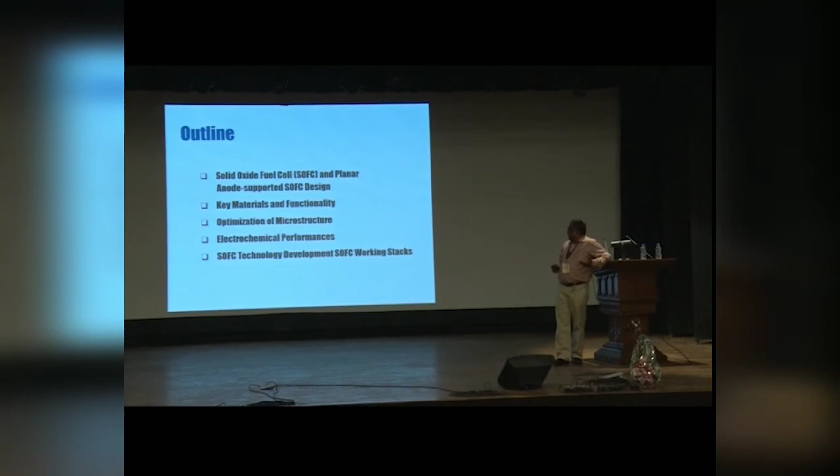So I thought to give you a little introduction about what a solid oxide fuel cell is and its particular design, and then we will talk about materials and their functionality, how we have optimized the microstructure and the role of microstructures, then electrochemical performance, and if possible I will show you a small video of how we made up to a 1 kilowatt solid oxide fuel cell for the first time in India. So with this, let me start my talk today.

Basically, as you know, we are in the era of coal, because we still have a sufficient amount of coal, and most of the electricity you are getting now comes from coal-based power plants. Some solar has started, but that will take much more time, although India has an ambitious program. But let me concentrate here. We are basically going from the fossil fuel era to the hydrogen economy, where the fuel cell is one of the very important candidates. Why it is important, I will talk about that.

But before that, let me tell you about these two. The first is carbon dioxide: whatever we are producing will not be allowed at one point of time to remain in the environment. So you have to stop that, and for that you need sequestration or carbon dioxide adsorption. A lot of R&D is going on all over the world, and a few technologies have started coming in the advanced countries.

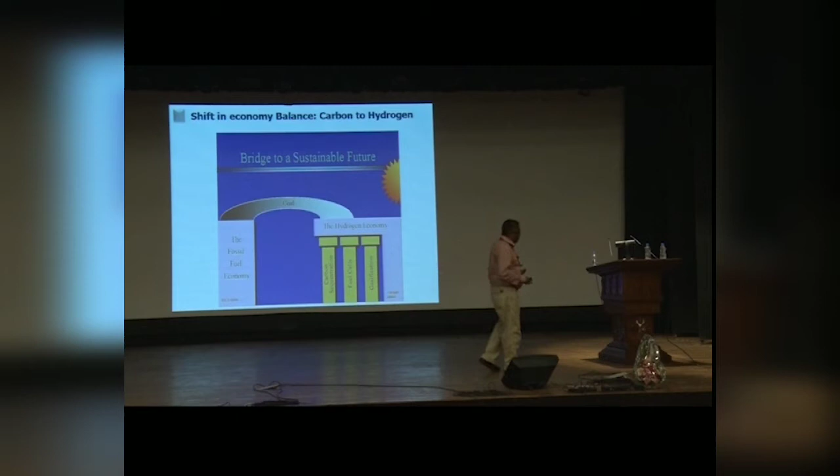Another one is gasification. In our country, BHEL and NTPC are the leaders, doing a lot of gasification work. They are trying to produce coal gas from coal instead of using the coal directly, because our coal quality is not that good. For that there is IGCC technology, which they have developed, and they are trying to supply this coal gas through vendors to all of us. Fortunately, that coal gas could be a very good fuel for the solid oxide fuel cell, which I will be introducing today.

So why fuel cell? There are three major aspects. One, it is environmentally benign. Two, its efficiency is very high; you will always get above 50% in the case of a fuel cell. And third, the solid oxide fuel cell operates at high temperature, around 750 to 800 degrees centigrade, so there is a lot of fuel flexibility. In general, all fuel cells can use hydrogen, but in addition to hydrogen, a solid oxide fuel cell can use natural gas, even petroleum and many other gases.

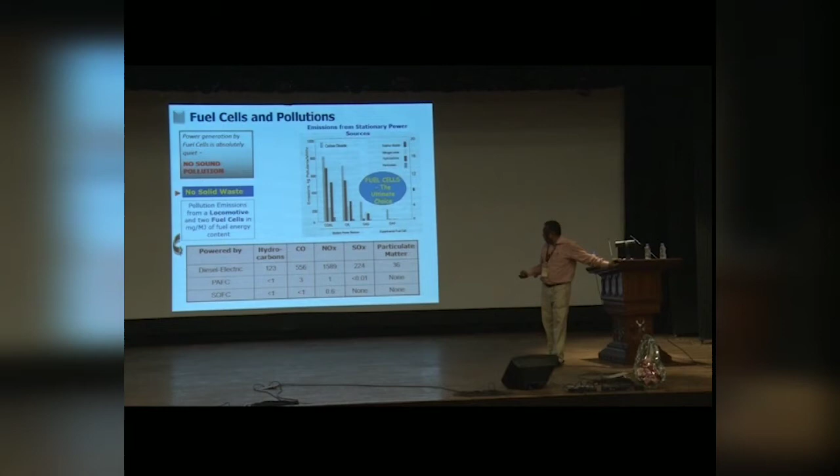As you can see, in the case of the solid oxide fuel cell, you do not have any particulate emission. In coal-based power generation, as you know very well, there is a huge amount of ash, and its disposal is a real problem. But in this case there is absolutely nil particulate matter. That is number one. Number two, the gases they produce are very low, acceptable according to the Kyoto Protocol. If you use CH4 or other hydrocarbons, there will be some carbon dioxide from the fuel cell, but that is very minimal.

Another advantage is that it's soundless. You will not hear any sound when it produces power. And you will be surprised to know that Google has been using it for the last 5 years in their main plant in California. They are getting power out of the solid oxide fuel cell itself. So the technology is very mature, and it is the way to come.

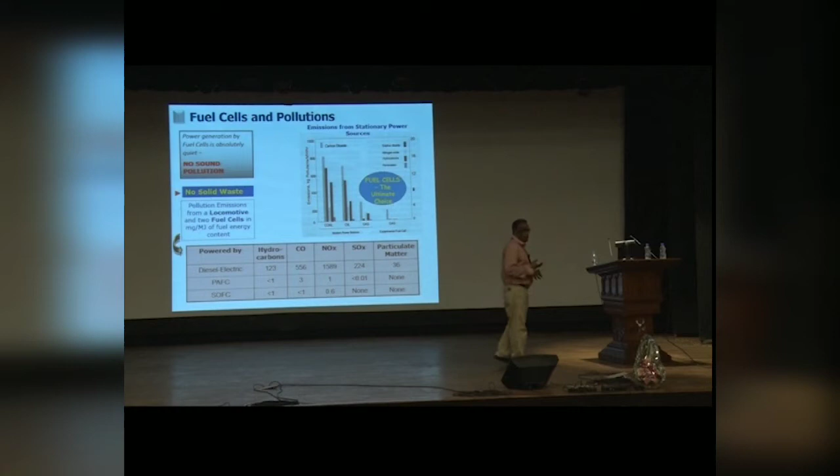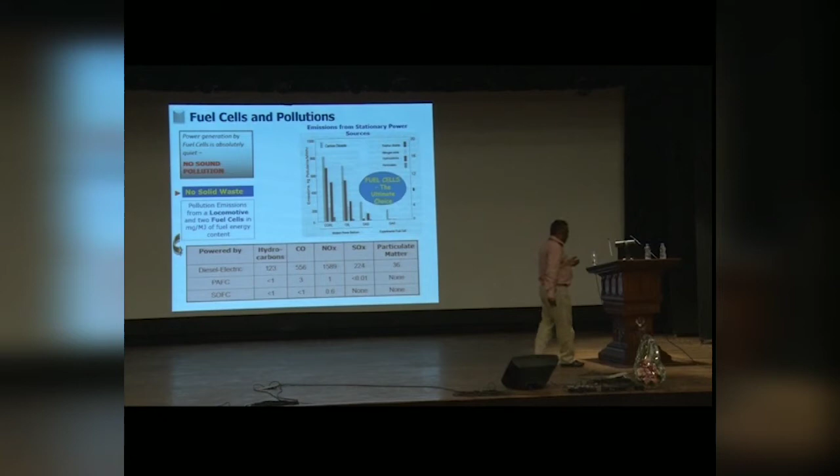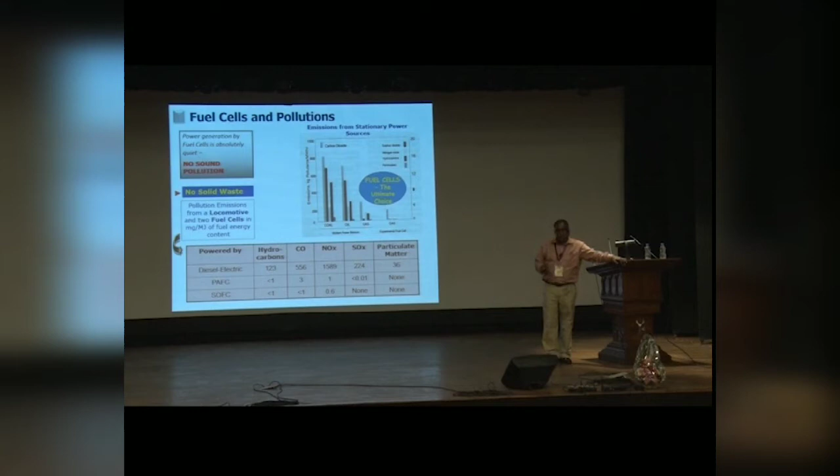But there are many difficulties because of cost effectiveness and so on. The major players are not coming forward to commercialize this particular technology because of the cost issue. But I would say that millions of small units in the range of 3 to 5 kilowatts are already in practice in households and many other utilities like hospitals, and, as I said, offices like Google's.

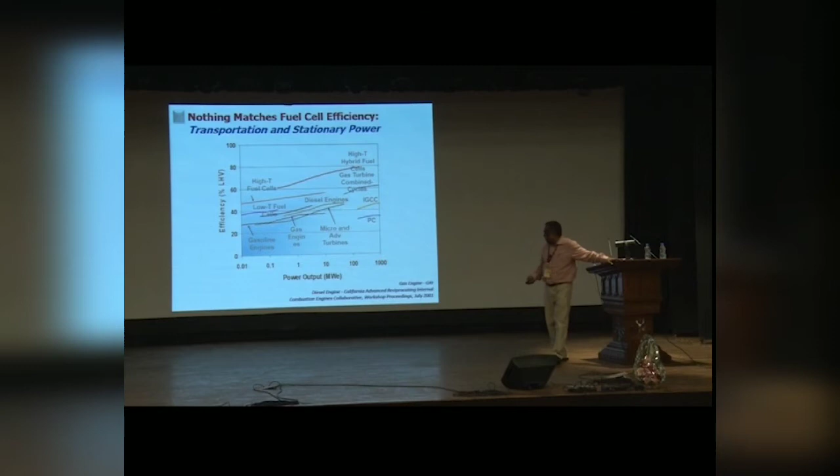So in a nutshell, a fuel cell is the device which can convert the chemical energy of the fuel directly to electrical energy. So there are no other energies in between, as in the case of coal, where there are two more energies it goes through, starting from the burning of the coal to electricity produced via the mechanical energy. But in this case, it is a direct conversion. So that is the basic difference.

Another difference is that, as you know, we use the battery. The battery is also a chemical device, and this is also an electrochemical device. It has anode, cathode, and electrolyte. Normally, the electrolyte is sandwiched between the anode and cathode, but there are many other designs. I'll introduce to you what those devices are.

So as I said, 1 kilowatt and more one can produce out of this solid oxide fuel cell, and another one is its fuel flexibility. As I said, different types of fuels can be used as an input for these fuel cells, and as long as you have oxygen or air on the air side and fuel on the anode side, you will get power out of these fuel cells.

In contrast, in the case of a battery, as long as its chemical constituents are there, you will get power, no matter whether it is a primary battery or a secondary battery. In the case of a secondary battery, what we call a lithium-ion battery, you need to charge it. In the case of a primary battery, which we buy from the shops, you have to throw it away. So that is the basic difference. In this case, as long as you keep on supplying fuel and air, you will keep on getting electricity.

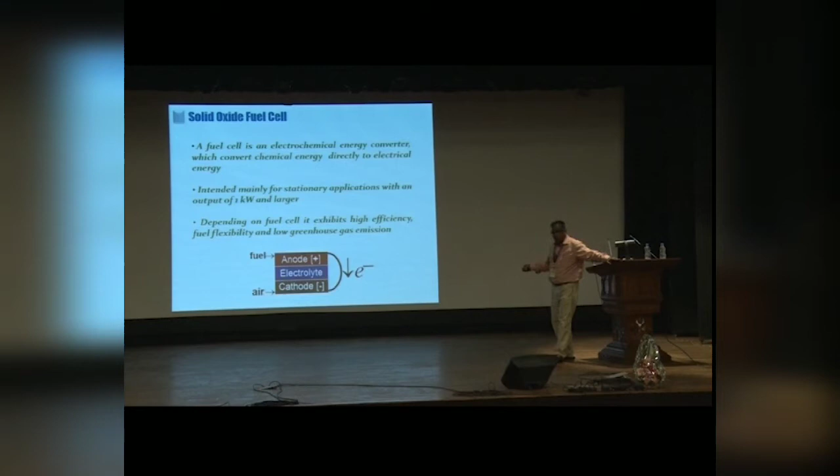So that way, you may see that it is a very simple device, because it is an electrochemical device. That's the reason it is very simple. But there are a lot of complications in making it and devising how to make the device. I will come to that very shortly.

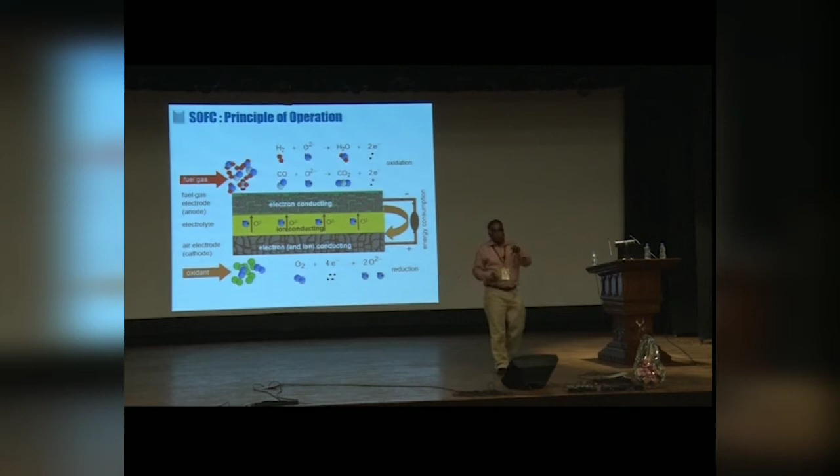But before that, very briefly, as I said, the electrolyte is sandwiched between the two porous electrodes. This is the anode, the green one, and this is the cathode. The electrolyte should be fully dense, otherwise it will not allow oxygen ions to conduct at high temperature. The electrolyte is chosen so that it conducts only oxygen ions at high temperature. It will not pass or channel any gas. So it has to be fully dense. That is the number one criterion.

So what is happening basically when oxygen comes to this interface? In electrochemical devices, one electrochemical reaction takes place between the cathode and electrolyte, and another electrochemical reaction takes place between the anode and the electrolyte. When oxygen comes, either from air or you put oxygen directly, it reduces the oxygen molecule and forms oxygen ion, O2- ion. So what will happen to the O2- ion at high temperature? It needs to conduct.

It will get the path here, that is the electrolyte, 8 mole percent yttria-stabilized zirconia. It has only ionic conduction, oxygen ion conduction at high temperature. So it will help conduct oxygen ions, and as soon as they reach this interface, they will combine or oxidize in the presence of hydrogen or carbon monoxide. Why did I say that? Because when you give CH4 or a hydrocarbon, there is carbon monoxide also.

So it combines with hydrogen. Let us take the simple case of hydrogen. This hydrogen and oxygen produce H2O and electrons. You will see that the electrons are always flowing, and if you tap here, you will get electricity. So that is the simple mechanism, but there are certain conditions.

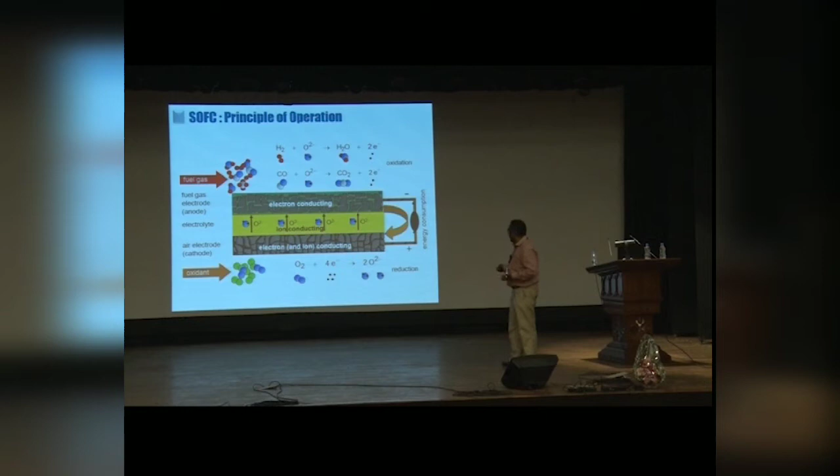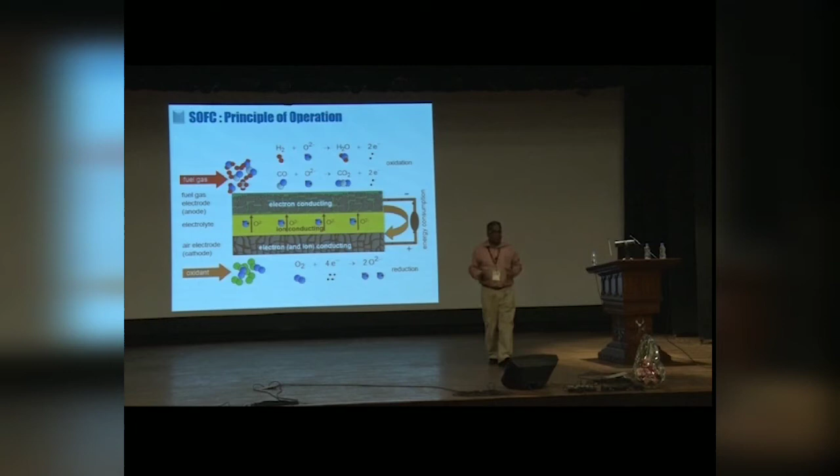And the other condition is that you must keep it at a particular temperature, at which oxygen ions can be produced. In our case, we keep it at 800 degrees centigrade, but from 700 to 800 degrees centigrade you will always get some oxygen ion conduction. So why is it happening? It is basically because of the Nernst equation.

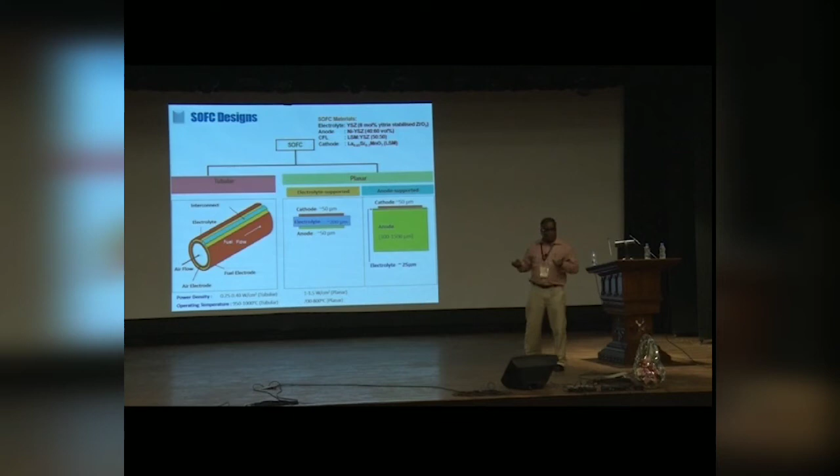So what are the materials? I have another slide, but let me tell you, the electrolyte is yttria stabilized zirconia, 8 mole%. It is commercially available. And the anode we are making by mixing nickel and yttria stabilized zirconia: 40 volume% nickel and 60 volume% yttria stabilized zirconia.

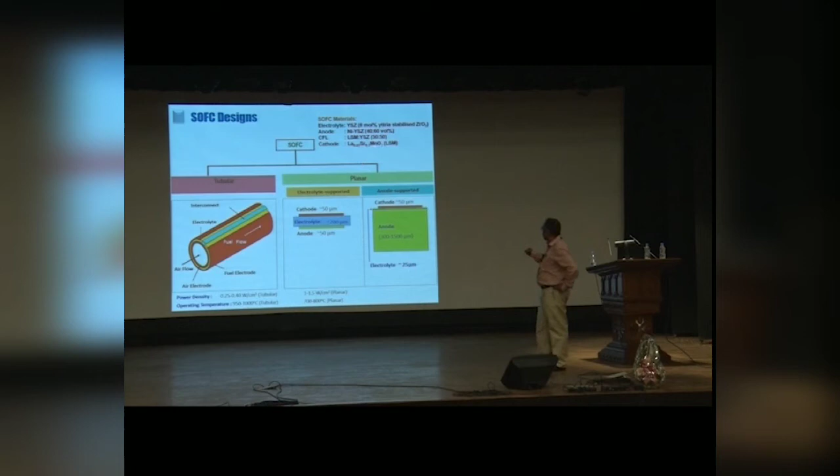Then you have LSM and yttria stabilized zirconia, 50-50. LSM is lanthanum strontium manganite, a perovskite, and this perovskite is used as the cathode, this layer. The anode is nickel and yttria stabilized zirconia, and yttria stabilized zirconia alone is the electrolyte. So this is more or less the material structure.

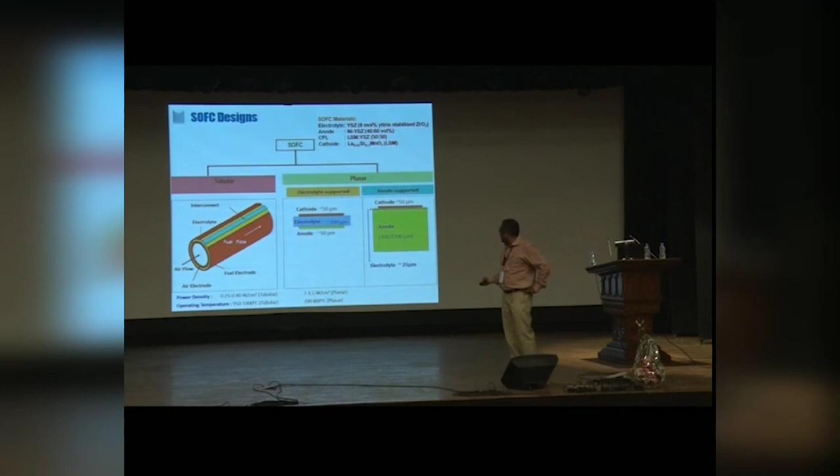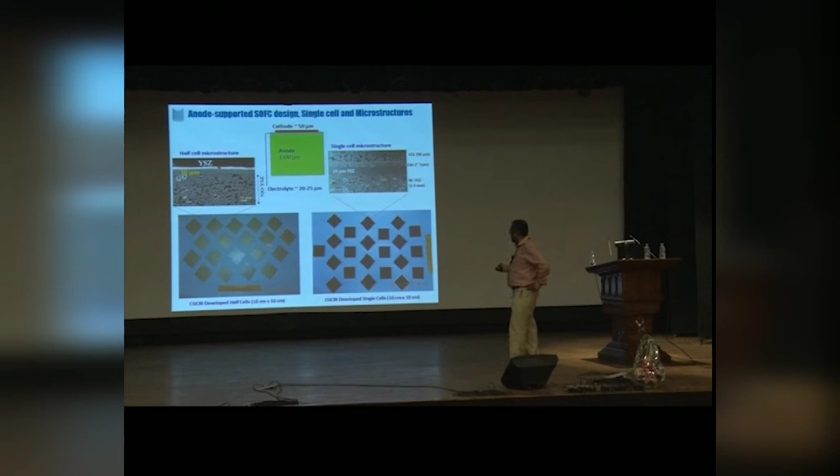In our institute, our mandate is to make a 1 kilowatt working device in India. For that, we are getting support from CSIR's NMITLI, New Millennium Indian Technology Leadership Initiative program. This is the third project running, and we have industry partners like GAIL, BHEL and ONGC. We are working together with the industry, and we have to make everything on our own at the institute. Our mandate is to have our own IPR, Indian IPR particularly, so that Indian companies can manufacture, market and produce it within India.

Otherwise, this is the energy technology, and they will not allow us to use their technology here unless we pay a hefty amount. So that is the reason you need to make it here itself. So this is basically the half cell we produce. Half cell is basically anode and the electrolyte. So that is a very important technology, because here you have to maintain this anode.

This is the microstructure of this. This anode is nickel oxide and YSZ, yttria-stabilized zirconia. It will become nickel and YSZ in situ when we start passing hydrogen, but initially when we fabricate, it is basically nickel oxide. So nickel oxide and yttria-stabilized zirconia both are basically oxides. So these two oxides, and on the top of that you have electrolyte that is fully dense, as I said.

So this technology we have made in our institute, and we are producing very big cells, 10 centimeter by 10 centimeter, and there is no porosity. If there is any porosity, then hydrogen will leak from this side to that side, and from the other side oxygen may come. If oxygen and hydrogen mix in this electrolyte, you will not get any voltage, there will be an explosion rather. So that is the reason this has to be fully dense.

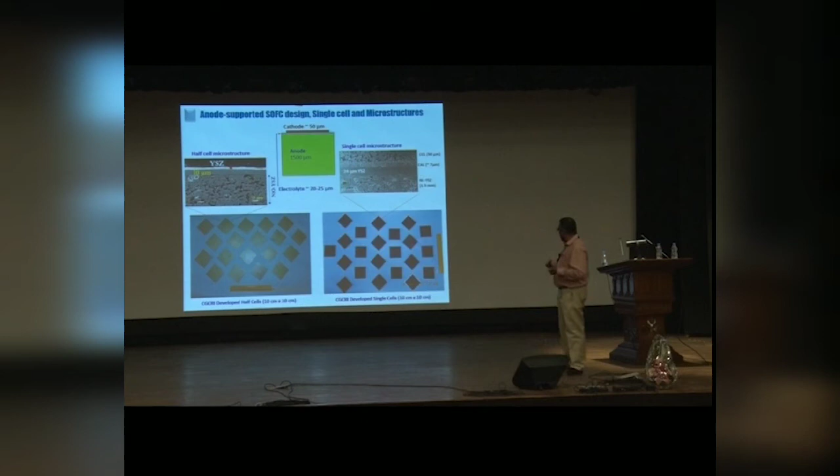This is very important. So once it is done, then we give this cathode layer. There are two layers, because to reduce the polarization you need to have a cathode functional layer, and then finally the cathode layer, the current collection layer actually. So these are basically cathode layers, and this is the electrolyte, an example of 24 micron yttria-stabilized zirconia. So this is basically the 10 centimeter by 10 centimeter single cell of solid oxide fuel cell, which we regularly produce, and this is the building block for making the stack.

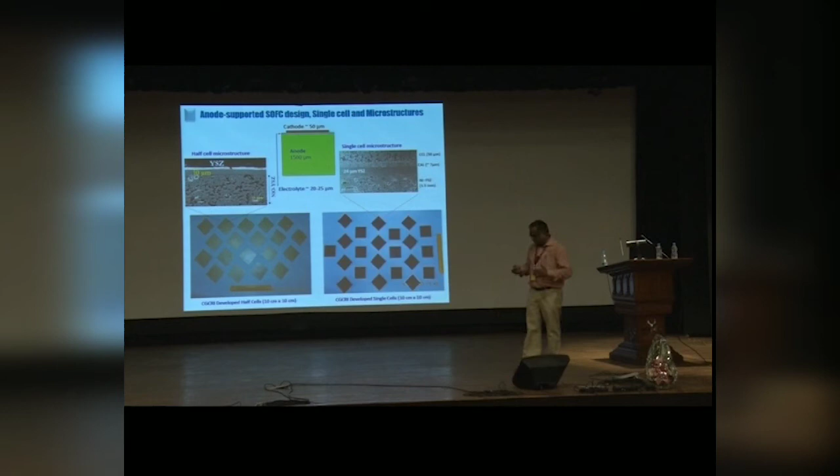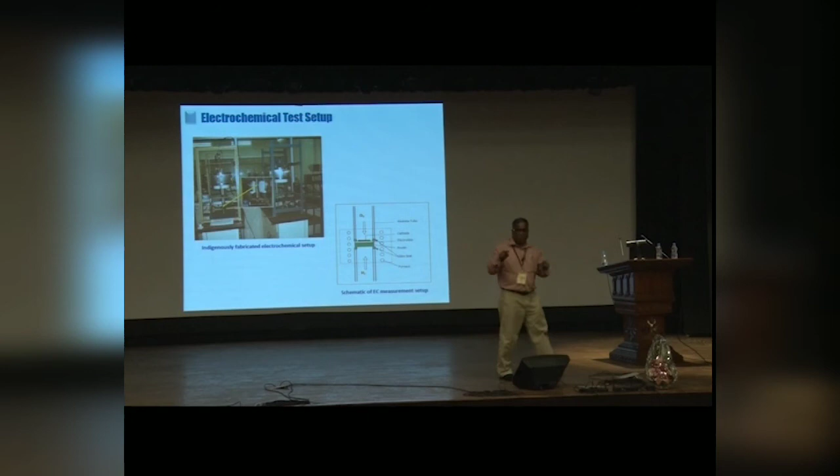But before going to the stack, you need to characterize them. So we make coupon cells out of the big cells, and we check how good they are. So this is the acid test, you can say. On one side we pass hydrogen, and on the other side we pass oxygen. These are basically alumina tubes, and these are the glass seals, glass rings actually we put over here, and then you test it at different temperatures, and this is the furnace.

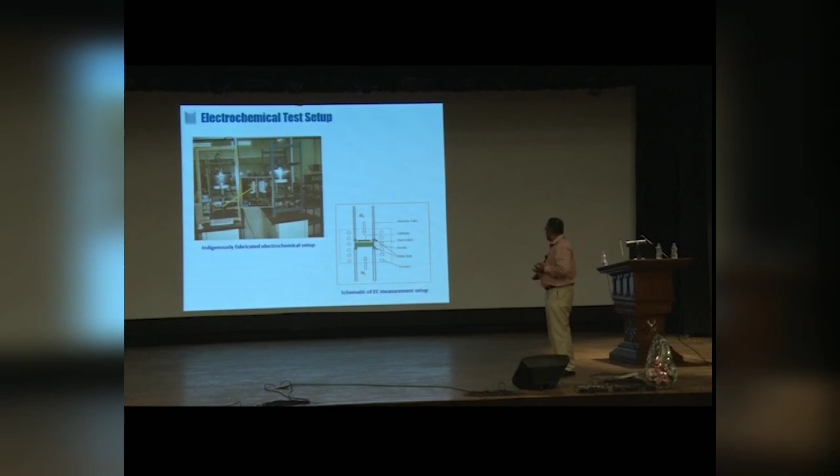We keep it inside the furnace. You can see here this is a split type furnace, and these two are the alumina rods, and our sample we keep inside this, and we seal it, and then on one side we pass hydrogen and on one side oxygen, and then we start the testing. In the testing, initially you will always get some open circuit voltage, called OCV. You keep it at a particular temperature, pass hydrogen on one side and oxygen on the other, and you will get some open circuit voltage.

And then once you start drawing current, at a particular point you can see that it will cross this voltage. So this 0.7 volt is the limiting. You cannot draw beyond 0.7 volt for a single cell. This is the international way of measuring the single cell. We also follow that. So where it is intersecting will give you the current density per unit area.

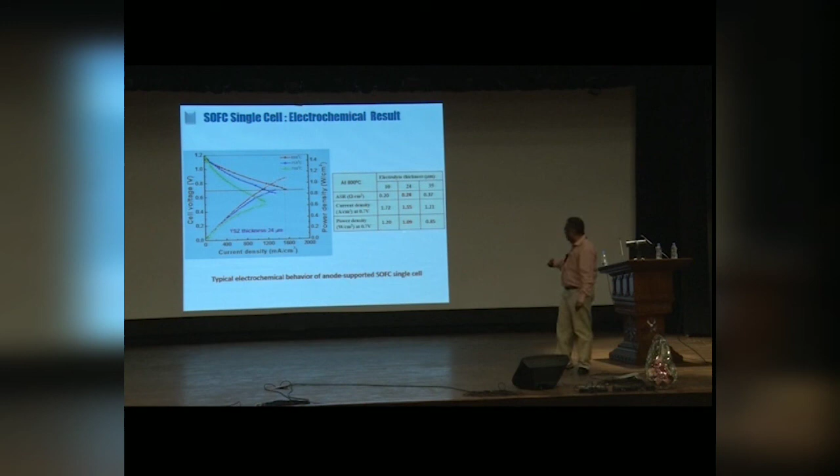So here, for example, for the 24 micron, this is the area specific resistance, but the current density you will get is 1.55, and if you multiply this with 0.7 volt, then you will get the power density, that is 1.09. So one cell can give you a power density of 1 watt per centimeter square in the normal case. But I will show you how one can increase it. But before that, let me tell you how to make a stack.

With 1 volt or 1.1 volt, you cannot make megawatt level or kilowatt level power. So you need to stack them together. Like you buy two batteries and connect them through a wire to make 3 volts. 1.5 plus 1.5 gives you 3 volts, and you can have much more glow in your lamp. So similarly, in this case, you need some interconnect material. This is called the interconnect material, with anode on one side and cathode on the other side.

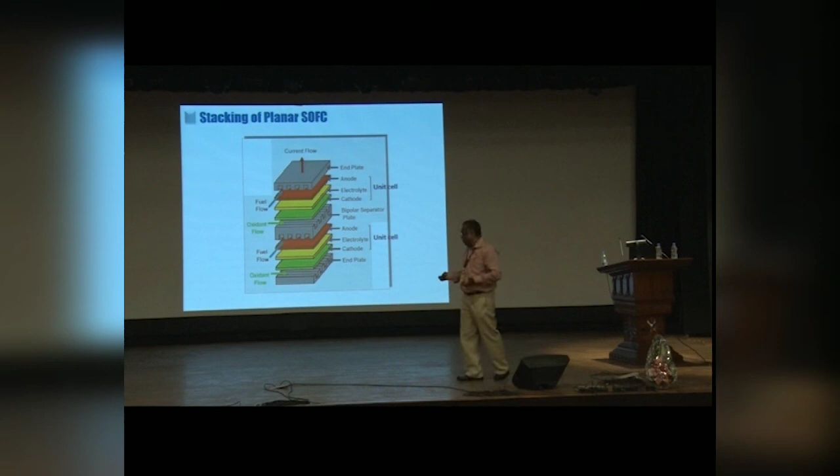That means plus and minus can be connected, and these are the expanded version of the cell which I just told you. This is anode, this is electrolyte, this is cathode. So the cathode should always be in touch with the channels where there is oxygen flow, and the fuel side should always be in touch with the channel where only hydrogen flows. So you have to make cells like that. That we are doing, and we are producing kilowatt level power. I'll show that at the end of my talk. But to make higher power or high performance cells, you have to go much more to the molecular level.

So just one thing I would like to say here. This is very important: although I said that at the electrolyte or electrode interface the electrochemical reaction takes place, basically there is a triple phase boundary. The triple phase boundary is basically the interface and the oxygen molecule, and there the electrochemical reaction takes place. So that place is very, very important, because in one place O2- is forming, and in another place there is an oxidation. So one needs to monitor that, and to do that you need to control the microstructure.

So I'm just skipping. These are all I said already. So basically, to keep the microstructure, I'll show you one slide. You need to have this type of powder morphology. You have to control your powder morphology by controlling the kinetics of your powder making technology, and we did that, because in some cases the powder has to be porous or it has to be core shell.

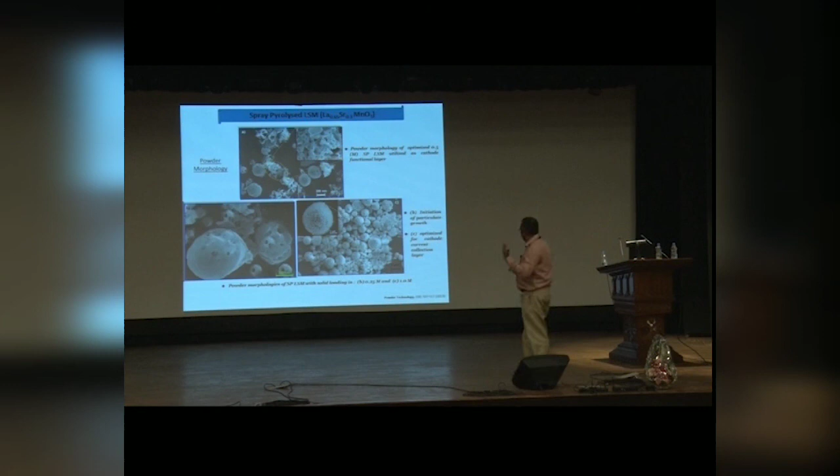So if you have this type of microstructure, suppose for example this is the microstructure. These are all basically nano powders, and there is a hole. It is basically a porous microstructure. This type of material one can introduce in the solid oxide fuel cell and achieve very high performance. That result I will show you.

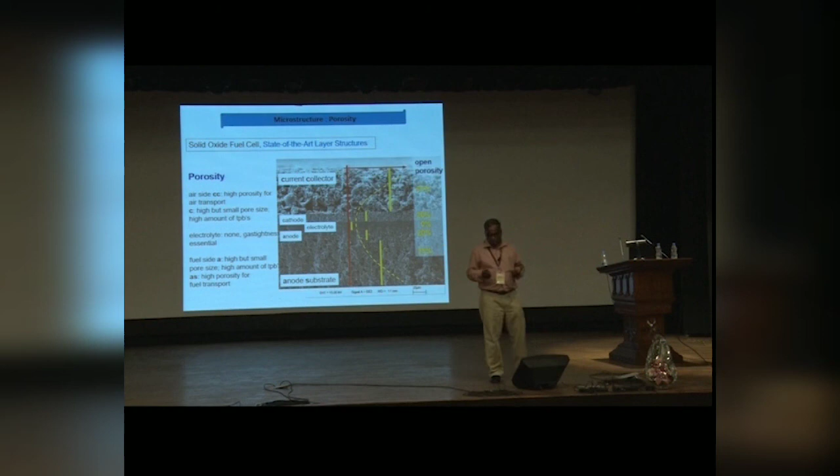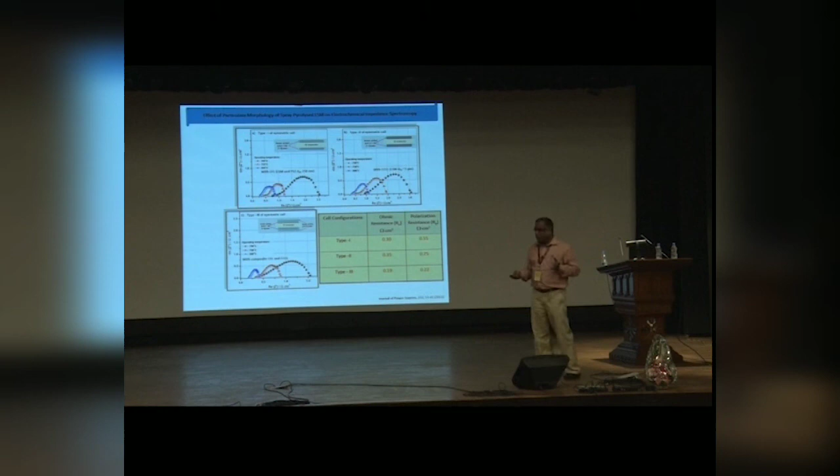These are some of the analyses which we have done. I am not going into that, but this is the microstructure which we produce, and you can see different kinds of materials have started coming: gadolinium doped ceria and lanthanum, cobalt, iron and strontium based materials. There we did a lot of impedance spectroscopy to find out which type of material is suitable, and with that idea we have gone to what I showed you earlier.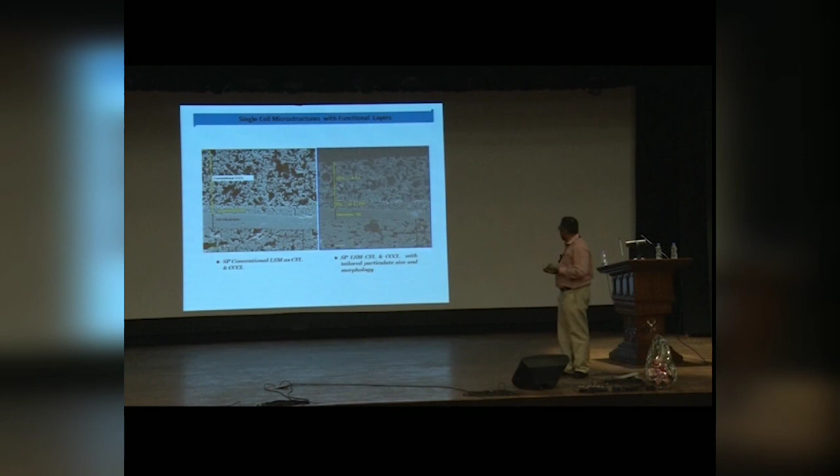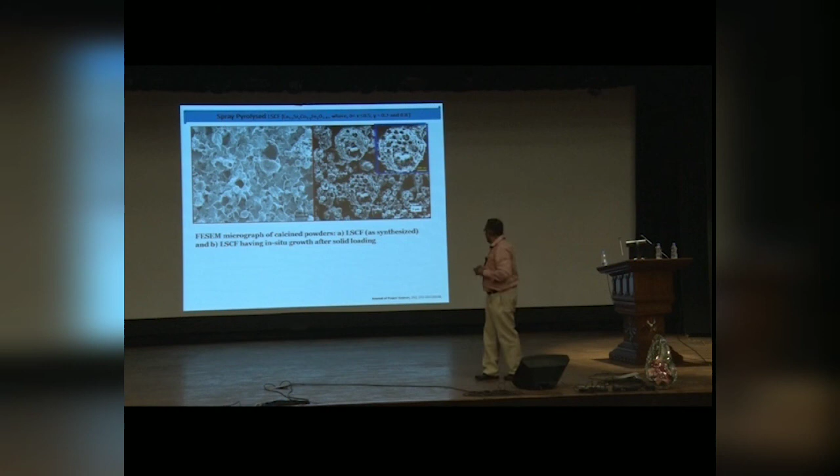There we have increased our current density much more by optimizing the spray pyrolyzed cathode materials, and these are again cells. But what I want to show you here is that although we have these buckyball structures in the powder form, after sintering at around 1100 degrees centigrade or so, we checked whether we are losing this particular morphology or not. If you lose it, then you cannot use it.

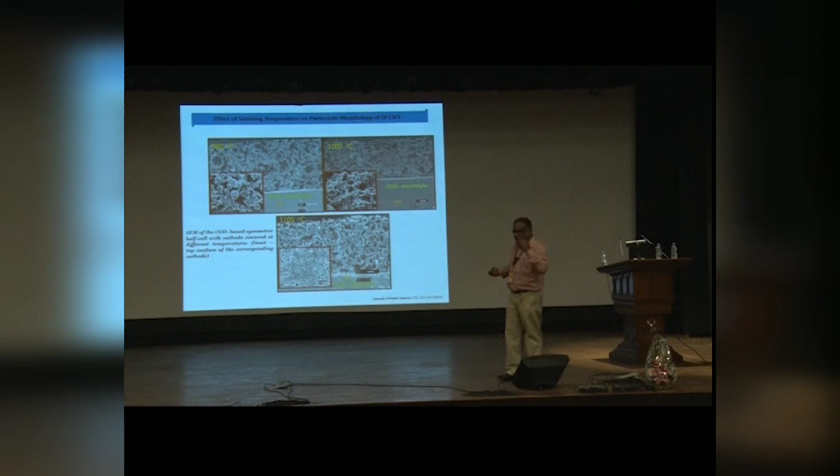So here you can see that we are using that type of structure, and it is very, very important. You can see from 900, 1000 and 1100, the structure is collapsing here. In this case you can retain that structure. So we need this type of structure. This is one example of how microstructure plays a very important role. So we optimized our cathode layer final firing temperature by doing all these experiments, and by doing that we can even go up to 5 ampere per centimeter square, and we patented all our results and published them later on.

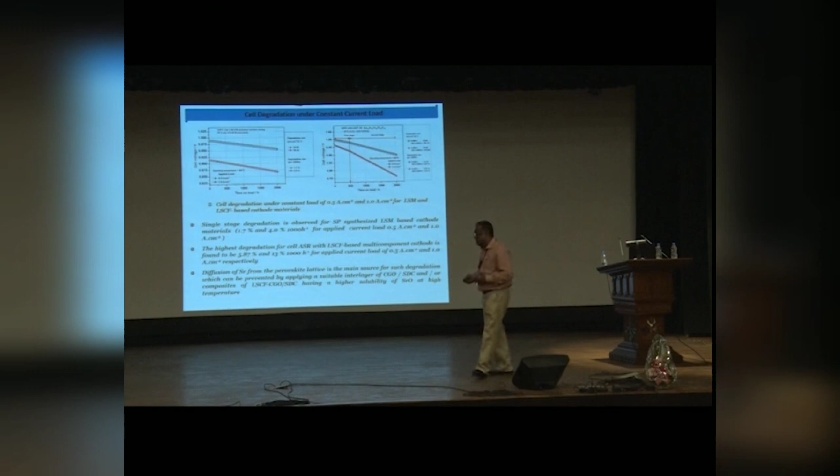Then there is another thing: cell degradation. We tried to check that by introducing several technologies, but I don't have time to say all those things. But we try to control that. Cell degradation means you are getting some voltage and some power today, but with time it is degrading. So that is not accepted. To address that, we normally introduce some functional layers.

I have to skip, I think. There is not much time. I am going straight to here.

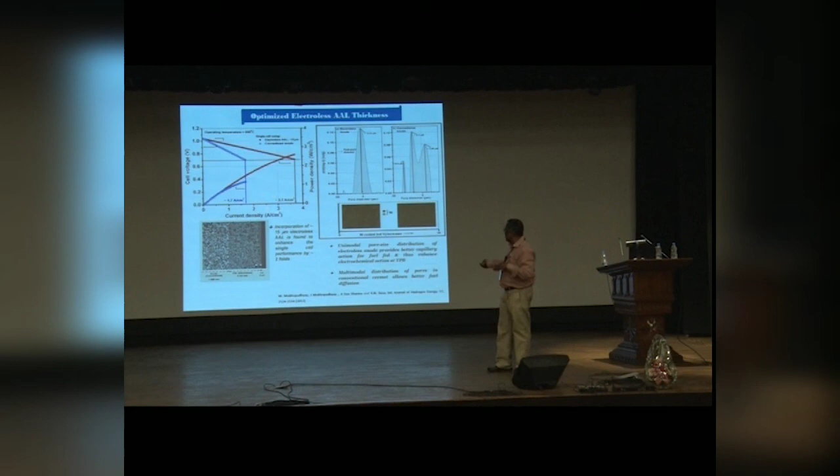Here, in the anode side, we introduce some functional layer, and we have pushed our conventional cell from 1.7 ampere to 3.7 ampere. But a lot of things one needs to do, and so I am coming to this.

Just I will take 2 more minutes, sir.

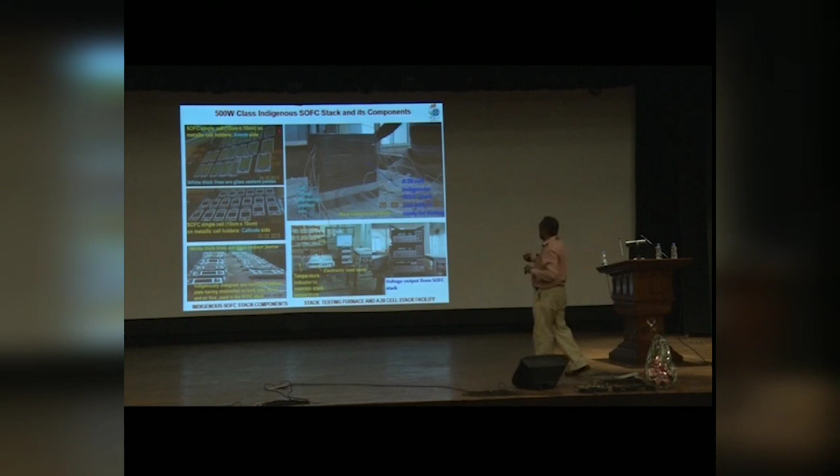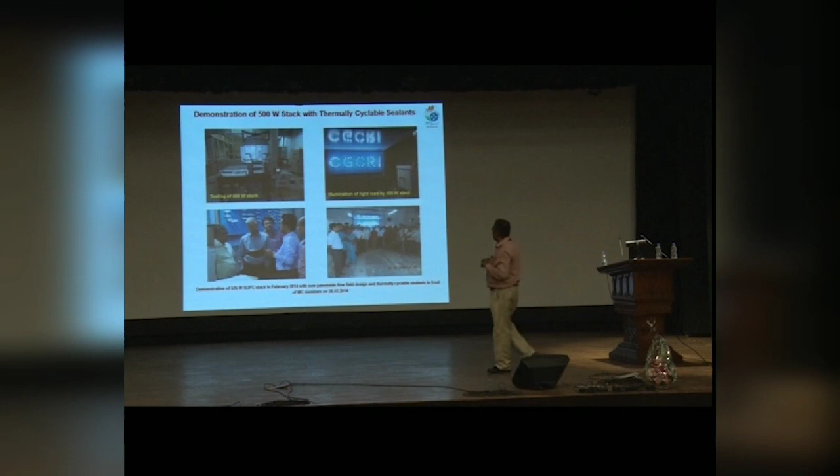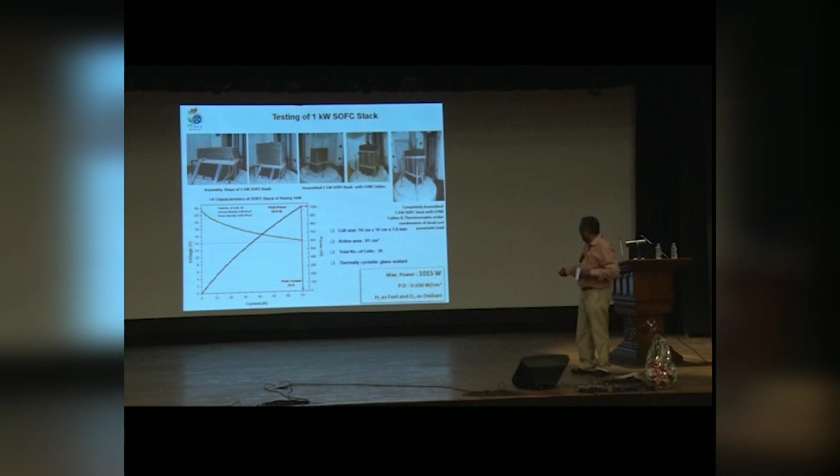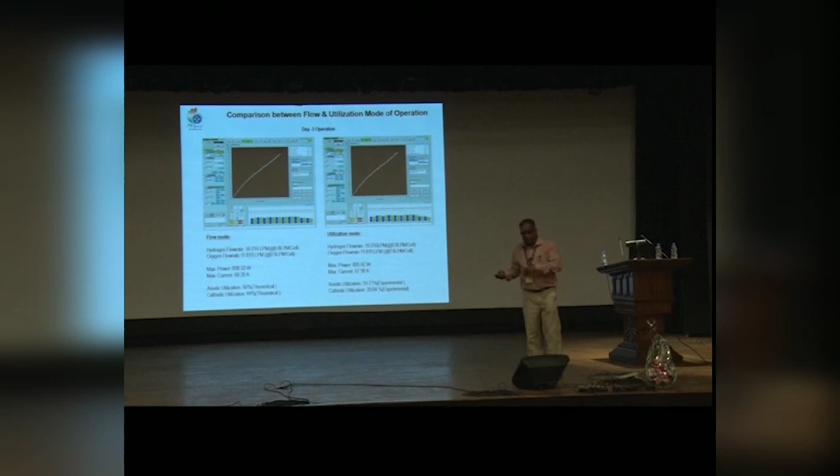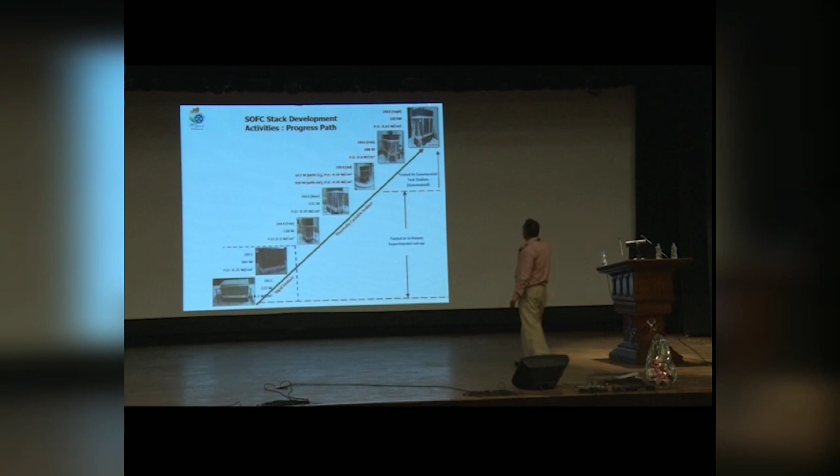At the international level, everybody is reporting between 0.5 to 0.6 watt per centimeter square, and we are also getting around this level, and repeatedly we are making 1 kilowatt modules, and it is ready for demonstration at our institute. We are using automated cell testing or stack testing units to do that, and this is our path. We started way back in 2012, and in 2016 we demonstrated this. So as I said, with a couple of

It is not operating, I think.